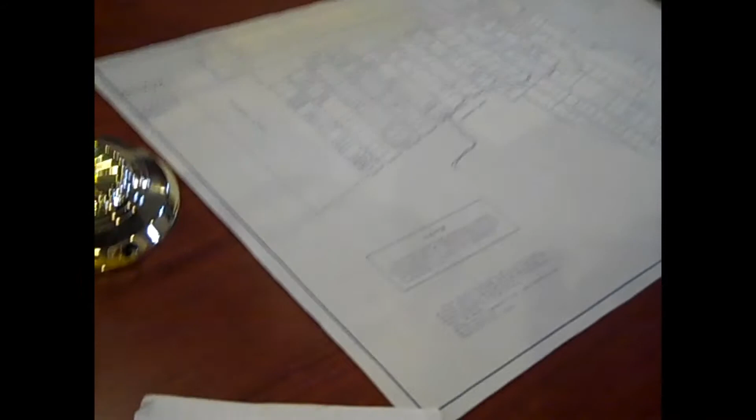We talked a little earlier about lotting plans. Lotting plans are something that originated in the 1700s as the settlement of New Hampshire was coming in. Basically, the process came down to this.

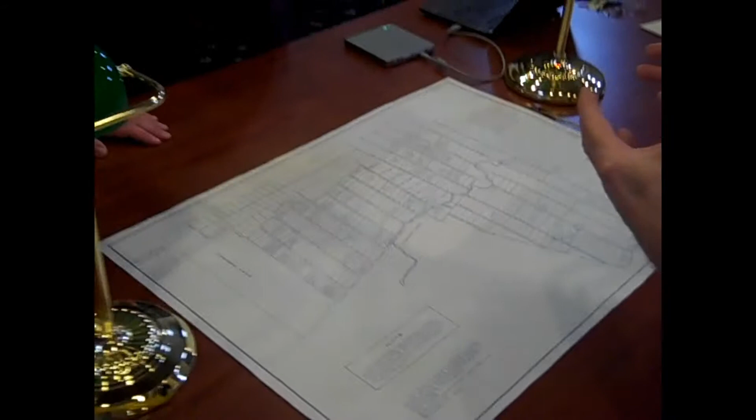The land was either owned by the colony, that is, it was the king's land, owned by the king and run by the king's governor, or it was owned under the claim of John Mason, that he supposedly purchased from a royal claim in the 1620s and 1630s.

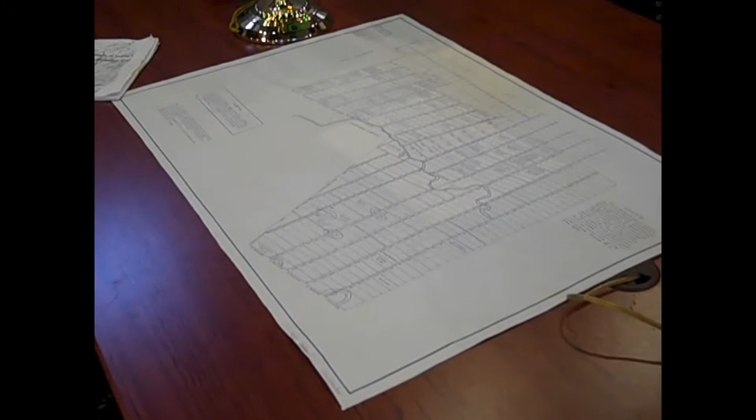If you look at a map of New Hampshire, you will see town lines that form an arc through this area. The town lines that form this arc now are following what is known as the Masonian Curve. That curve was surveyed in 1758, trying to mark on the ground that line that was 60 miles from the ocean.

All of what was claimed, between the ocean and that curved line, was what was claimed under John Mason's claim - a claim that was purchased in 1746 by 13 wealthy merchants in Portsmouth, known as the Masonian proprietors, that is, the proprietors under the Masonian claim.

A lot of towns had already been granted in that same area by that point. And they simply said, all right, we recognize those claims, that's fine. But anything that hasn't been granted belongs to us, and we will do the granting.

So groups of individuals, ranging maybe from 60 to 100 or 120 people, would send a petition to the proprietors, asking for land. The Masonian proprietors would say, yes, we'll give you a tract of land 6 miles by 6 miles in a particular area. Go out, hire a surveyor to mark it on the ground, and come back to us with that description, and we will give it to you.

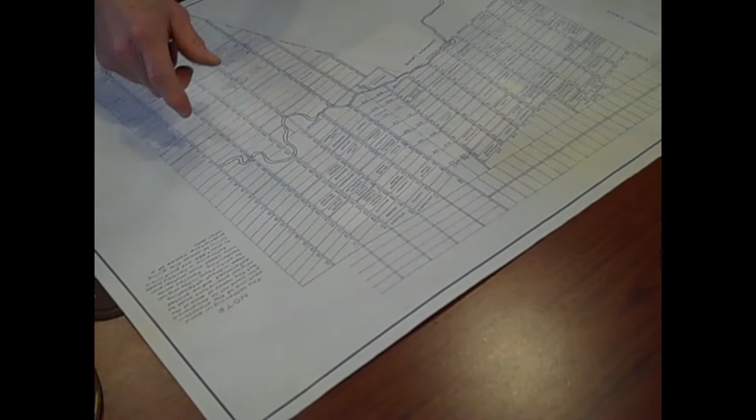What they typically did was divide it by having the surveyor run long lines across the town at certain set intervals, generally 160 rods, and mark those out - those are range lines, and that would be a range of lots.

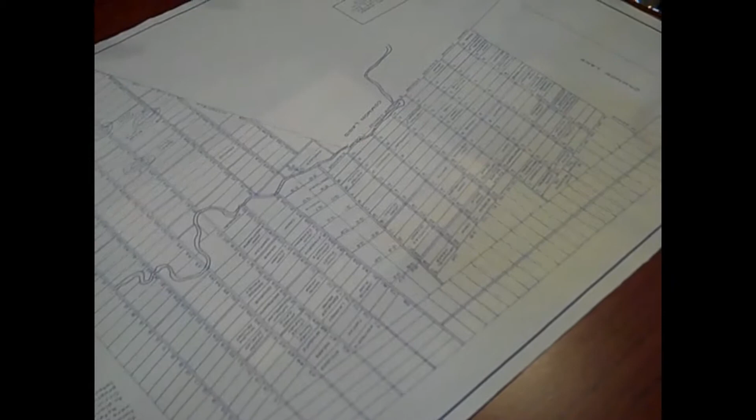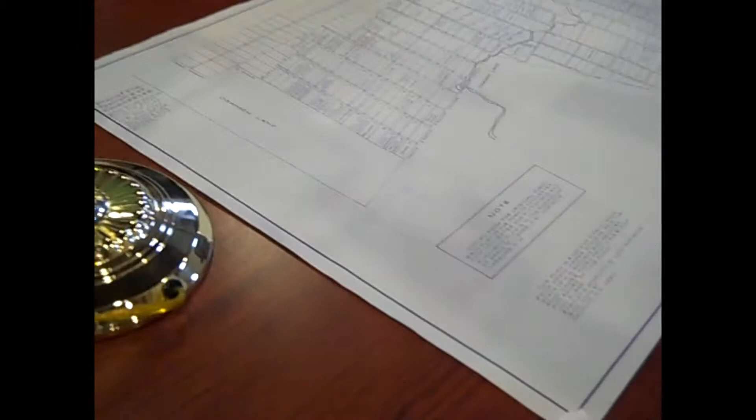Those ranges would then be divided into parcels of land at a certain acreage. If you wanted a 100-acre parcel, you would measure 100 rods along that line. That's why you did the 160 rods having parallel lines, because you could say, if you want 100 acres, you measure 100 rods and mark a corner, another 100 rods, mark a corner, and so on. If you want 80-acre parcels, measure 80 rods, 80 rods, 80 rods, because the mathematics worked out that would give you an easy way of setting how large a parcel you can make.

So typically you find lots in the 100 plus or minus 20 acres range. 80 acres to 120 acres is typical. This plan looks like all the lots are approximately the same size.

I know in Plymouth, the land was granted in 100 acres of upland and 20 acres of interval land, and there were different strategies. I'm not seeing that along the river here. Is that typical? There were several different strategies.

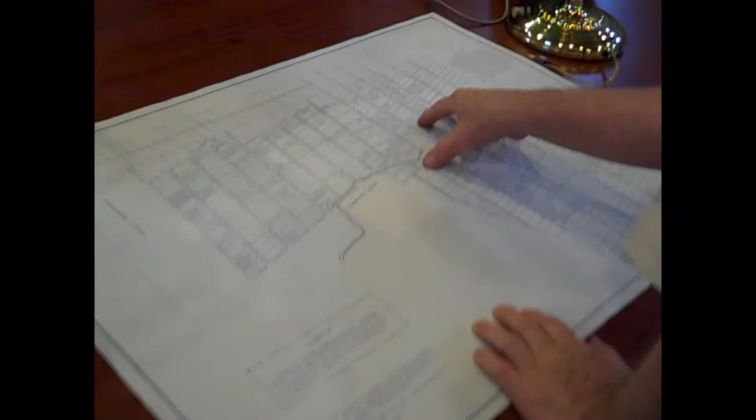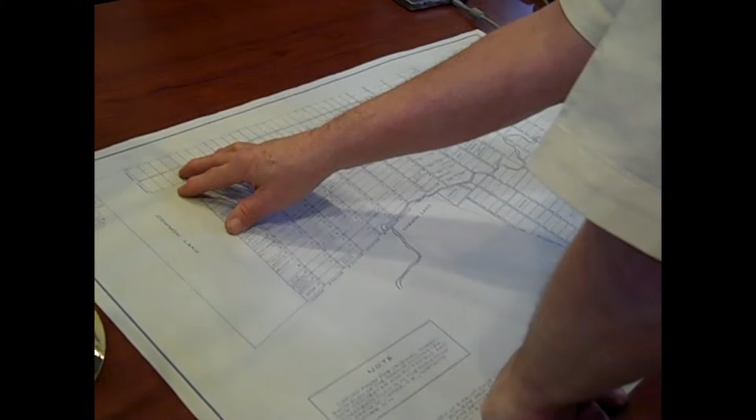I think there are three sort of general practices, and one is what was followed in Plymouth, and it followed generally that type of lotting. That is, you would have relatively small lots along the river, trying to form a nucleus settlement to make it easier to protect yourselves from Native American attack or whatever. And then you'd go out into the larger tracts of land. So you would have a house lot, a larger garden lot, and then a fairly good-sized wood lot. That was one strategy.

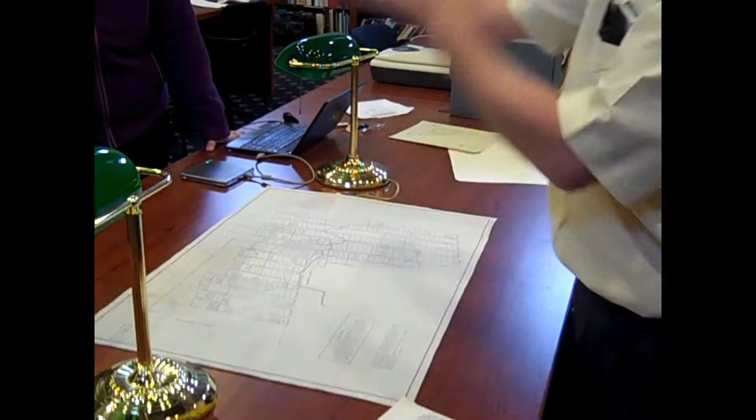Another is a strategy very similar to this, where it looks to me like maybe they laid out this little area here to start out with, and then they laid out most of the rest. They ended up with some gores that they then added on later and divided in their own separate ways. So in this particular case, it looks like there might be 3 different times when they divided the land up.

These, and then these, and then I don't know what this is, but this is probably lots and ranges from another town that were annexed to this particular town. This is Chichester, I think. So this may have been a part of Canterbury or Loudon or whatever that eventually got annexed to Chichester to become part of Chichester.

But then the third way, which I see quite often, is that there's a surveyor—I know his name is clear as mud, it's right on the tip of my tongue—who surveyed, Henniker for example, surveyed the outside just the way Bob Woodard surveyed the outside of the block.

And then at certain intervals, 160 rod intervals, he marked the ranges. And then when he went across the north line of the parcel, he was marking 100 rod distances. And then what he did was run across a range line marking 100 rod distances, but wouldn't bother to do the lot line that connected between the 100 rod mark on the north line and the 100 rods on the range line. That he left to the individual owners to figure out where that line was. He just simply marked every 100 rods and went up and down these range lines, marking off his 100-acre lots. And it was done all at one time.